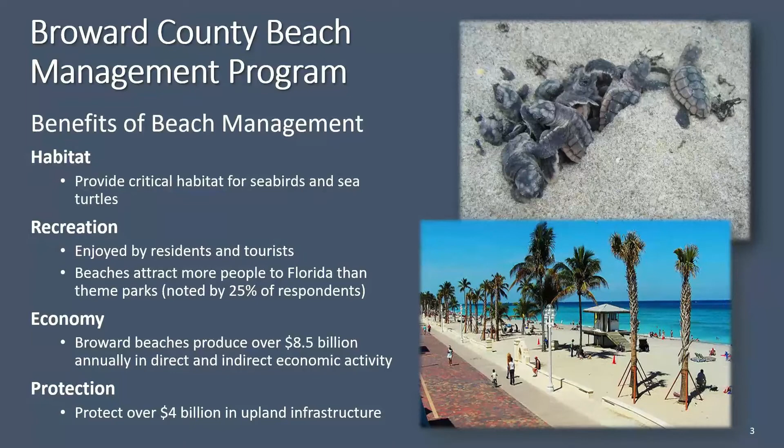So what got us here? Well, many of the beach management issues began with the deepening of local inlets. One of these issues affecting the whole of Southeast Florida to some extent is that offshore Atlantic waves tend to wrap around the Bahama Banks and approach our shores from the north, which means that littoral sand transport within the nearshore zone tends to lean in a southerly direction about 80% of the time. With dredging and deepening of the inlets, the net southerly movement of sand was typically blocked to some extent.

This disturbed downdrift sediment budgets. Over the years, many ad hoc efforts were made to stop the resultant beach retreat, with groins and hard armoring most prevalent. For the most part, they weren't effective. While they may have stabilized a small part of the beach, due to the limited amount of sediment within the coastal system, they typically only aided in accelerating erosion rates.

At one point, it's estimated that there were over 230 groins distributed along the county's coast. Because of the need for expensive repair and rehabilitation, a majority of these structures eventually ended up neglected, defunct, and simply hazardous. By the 1960s, the beaches were in such a state that, recognizing the need for a coordinated effort to combat the erosion, the Broward County Shore Protection Project, also known as the federal project, was authorized under the Rivers and Harbors Act of 1965. This act created a framework that allowed the federal government to enter into agreement for cost sharing and reimbursement of planning, design, and construction costs, among other things, for the beach renourishment projects in the county.

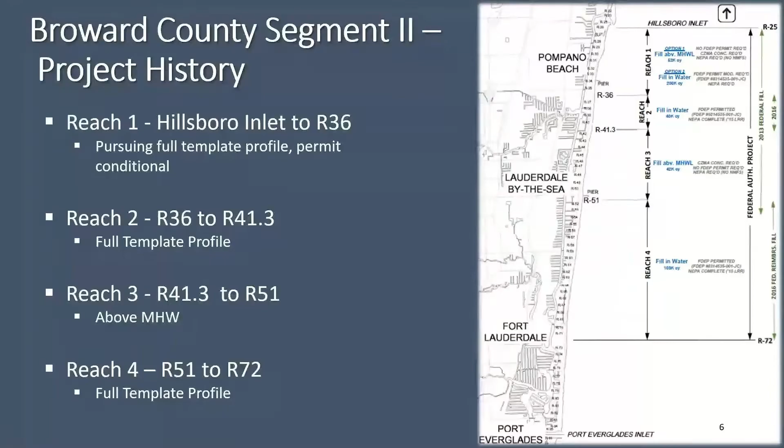With that, I'm going to hand it back to Sam Danchuk to give you an update on what to expect with the upcoming beach project. Thank you, Greg.

As Greg described, this project is being constructed by the U.S. Army Corps of Engineers instead of a contractor hired by the county with city participation. The significance there is that this project, because it's a repair project, is actually saving us money — the funds are not coming from the county and the cities. The funding will come 100% from the federal government.

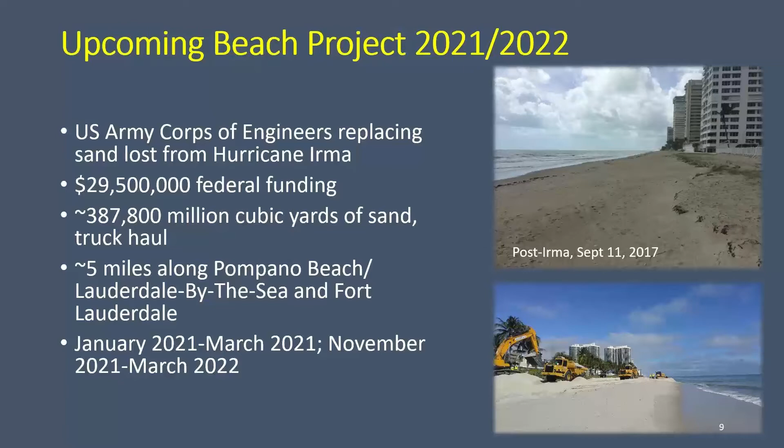The goals of this project are ultimately to replace losses from Hurricane Irma, to limit disruption of beach use and traffic patterns—which is why I imagine many of you joined today's call—and also to avoid environmental impacts and add storm protection to our beaches, to ensure that when we have hurricanes and tropical storms, erosion isn't so severe that it causes damage to property.

It's really, really important to maintain our beaches, and our goal is to maintain beaches as wide as 75 feet in width, although that varies.

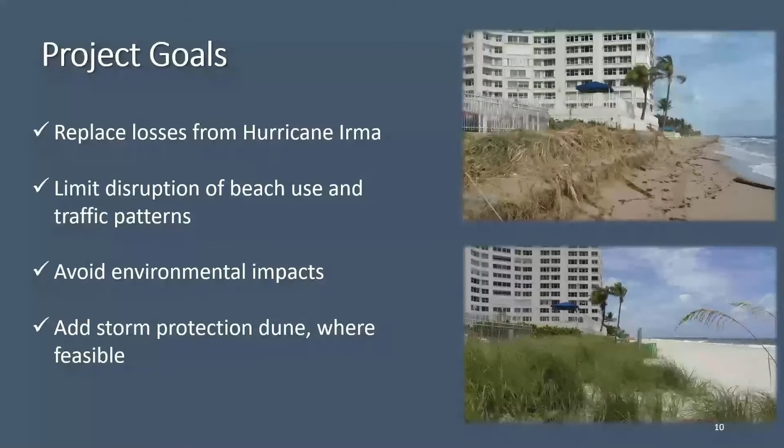The sand itself is coming from sand mines in the center of the state of Florida, and these mines have been pre-approved by the state Florida Department of Environmental Protection. The contractor will have the option of selecting which sand mine to use, and there will be a specified route that they're allowed to use to bring in the trucks of sand.

All of the sand must meet very strict requirements related to the sand grain size, the color, how much silt or fine material is in it, how much shell is in it, so that it matches what the sand looks like on the beach today. So it's very important. We don't have this information yet, but we will on our next update in February.

The contractor will provide his plan for controlling the traffic and ensuring that everybody has easy access in and out of their homes, and to minimize disruption as much as possible within the local routes.

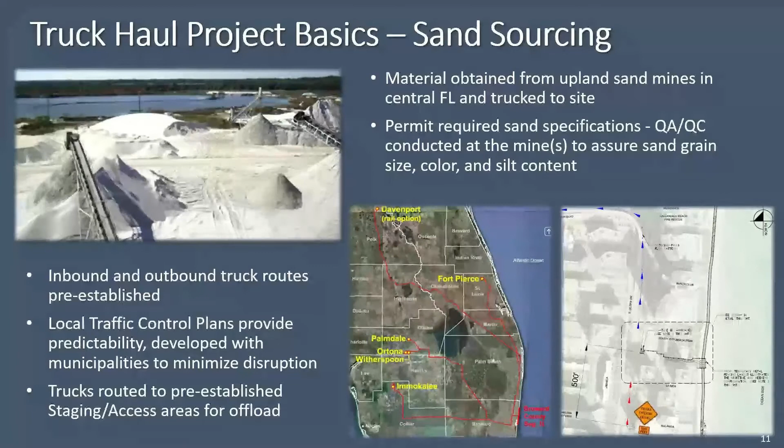Just to confirm, the sand will look like the sand that's on the beach today. Over time, sand does change color slightly. As the sun bakes it, it actually lightens the sand even further. But you can see examples in this photo of sand that has just recently been truck hauled and placed on the beach, and it must match the native sand, which in our case is sand that was previously placed on the beach from previous truck hauls.

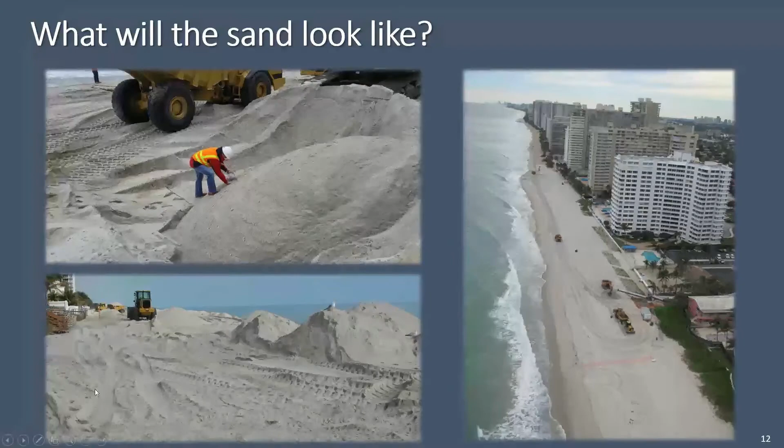To begin our discussion about staging and access, the trucks will be bringing sand to the ends of the streets and essentially getting them prepared to be moved onto the beach. There will be multiple points that are used for sand transport, and then there will be fencing erected to make sure that there's secure areas that are the active work zones.

There will be heavy equipment on the beach in order to move the sand and dress the beach, essentially make it the shape that it needs to be, to create the final shape and slope of the beach. So you may see excavators on the beach, dump trucks full of sand, or other heavy equipment that's needed in order to move the sand around.

In some areas where there may not be space to bring a truck onto the beach, you may actually see a conveyor belt. This was used in one of our last projects, a conveyor belt to move sand from the end of the street onto the beach.

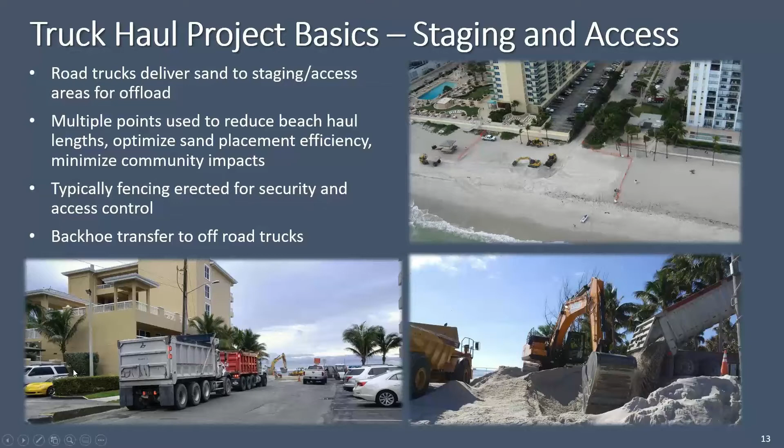To describe how the work zones will look, essentially from the street end, the contractor will need to actively be transporting sand up and down the beach and moving its equipment. So they will be making it very clear where their active work zones are. They will have traffic lanes demarked with signage or even temporary fencing, and they'll have safety vehicles that go up and down the beach with the trucks, so that there's as little risk as possible for anybody coming across that area and walking on the beach.

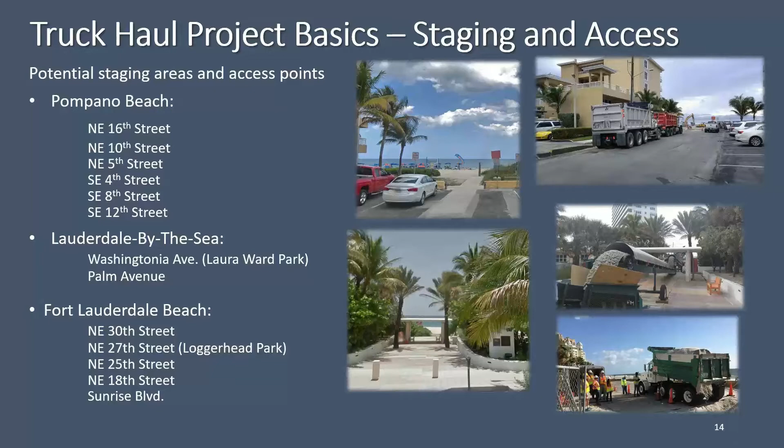The construction zone itself can be as large as 1,000 feet. It's really, really important that the public stay out of this active construction zone. There will be fencing, signs, physical guides, and people standing there trying to advise people to stay out of the area. I can't emphasize this enough.

The trucks are loud. They do have horns that should be on when they're backing up. But it is extremely hard for the truck drivers to see people on the beach when they're driving by. So please do not take any risks and go anywhere past the fencing. We want to make sure that everyone stays safe as part of this project.

And sometimes it's really hard to hear horns and trucks on the beach when the waves are really rough, so I really just want to emphasize that. If you see an active construction zone, please ask if you can go past it, and please read the signs carefully to keep yourself safe.

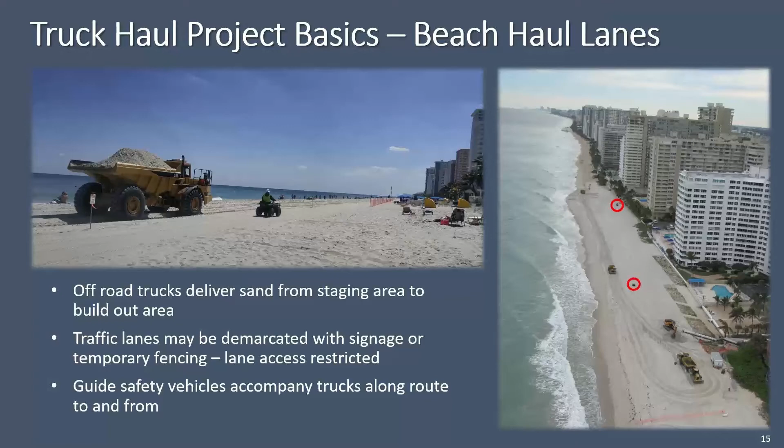I just want to be clear about where sand will be placed.

Greg gave you two examples of how, depending on what the offshore environment looks like, sand may either be piled up in a narrow section, only in the upland above-water portion of the beach, or in some areas the sand will be placed and moved below water to give a full template of the beach. Whatever you've noticed in past projects, the same type of project is going to be built this time around.

Some property owners have provided perpetual storm damage reduction easements, which allows sand to be placed in a small area on their property to maintain a continuous design line of sand. We recently went through another round of trying to get all these easements in place. If a property owner did not provide that easement, sand will either not be placed in front of their property, or it will be placed seaward of the erosion control line, which is a line already adopted by the state that allows sand placement anytime. We'll be very careful not to place sand where anyone hasn't allowed us to, but where permission has been provided, there will be sand so there's continuity in the beach.

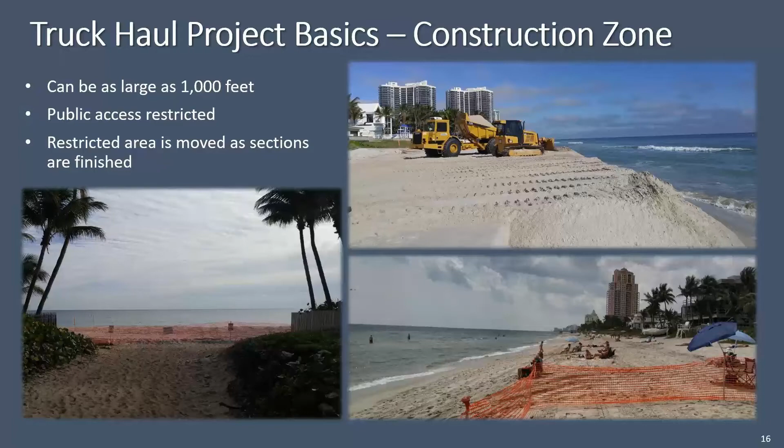Throughout the project, several items will be monitored. Vibration monitors will be placed near the buildings, adjacent to street ends and access areas, so vibration can be tracked to ensure there's no structural damage from trucks driving past. Also, as sand is pushed into the water, there will be turbidity monitoring to make sure no plume of fine material is released, since we wouldn't want any damage to the reefs. Water samples are taken throughout the project to make sure turbidity never gets high enough to risk the reef.

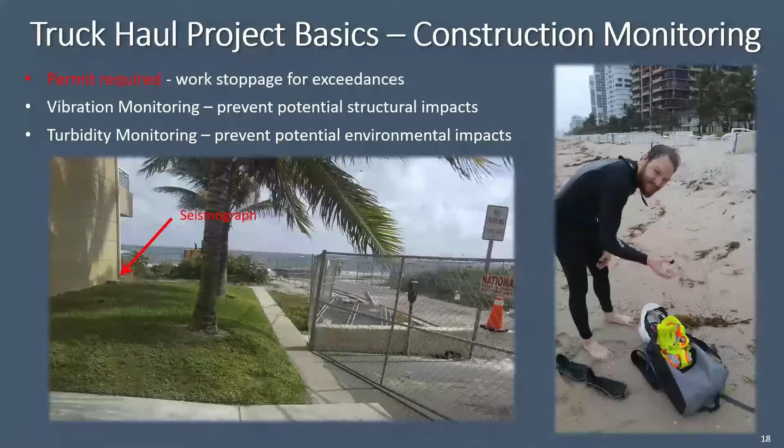Additionally, environmental monitoring will happen during and after the project to make sure none of the near-shore hard bottom, coral, or other reef resources are impacted. Specific species are monitored related to coral, as well as sea turtle monitoring that happens throughout the year to ensure no harm is done to turtles, as well as to seabirds, which nest in February and March, making sure there's no risk to any other marine animals or resources.

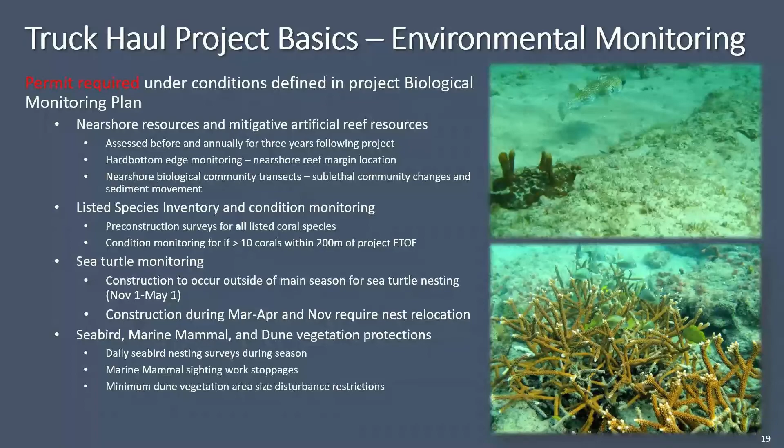Next slide, please. Since it's a great opportunity to speak directly to beach stakeholders, we wanted to raise that we do have sea turtle lighting ordinances in effect throughout the county.

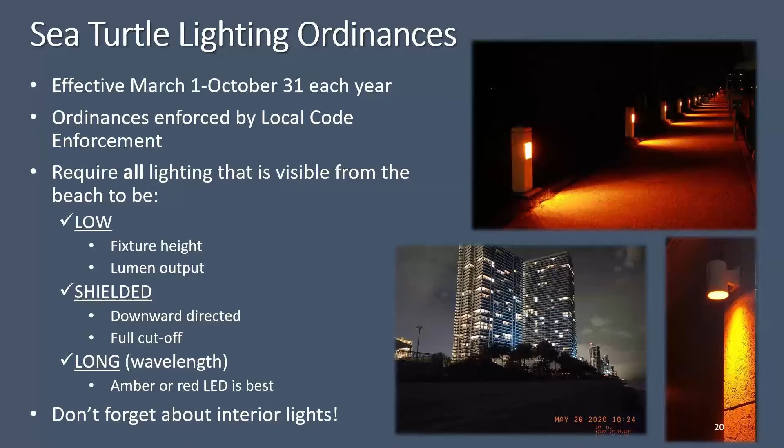From March to October 31st is sea turtle nesting season, and it's required that all lighting visible from the beach have an appropriate fixture height and warmth or lumen output, be shielded so there's no direct light to the beach, or even have a full cutoff so light is focused straight downward where needed for safety, not allowed to escape to the beach. It's really important to remember interior lights too. The examples on the right show that if you have all the lights on in your kitchen, that can be seen from the beach and is very disorienting for the turtles. We'd really appreciate it if you draw the shades and comply with the ordinances in effect.

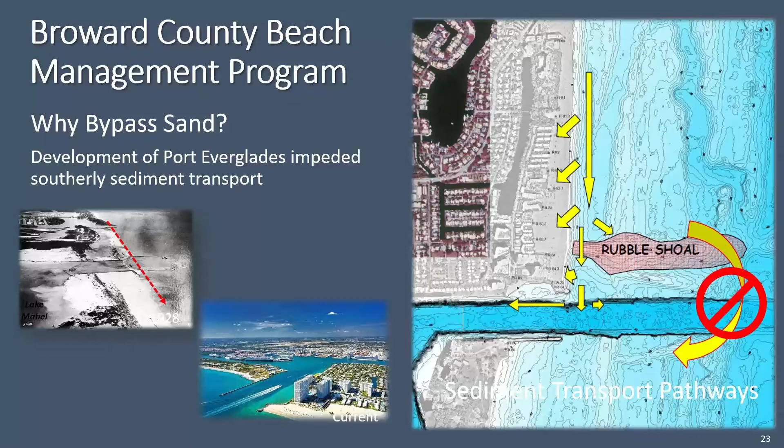In order to build this mechanical sand transport setup, we need to build a giant hole at the north side of the jetty: an 11-acre sand trap dredged to a depth of 29 to 50 feet, removing about 365,000 cubic yards of material.

The jetty on the north end will be rehabilitated so it doesn't allow sand to pass through into the center of the inlet. Then there will be a mechanism so sand can be dredged from that sand trap and moved to the south every 2 to 4 years as it fills up.

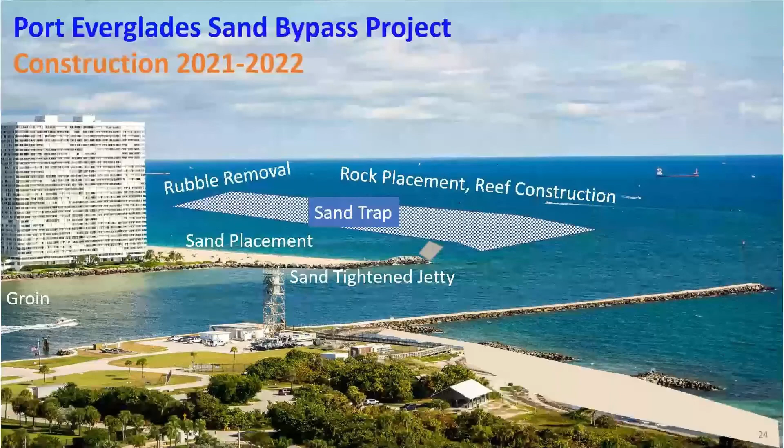This project is in procurement now, and we hope the county will award a contract in April of 2021. Dredging could begin anytime between May and November of 2021, with jetty improvements happening during that time as well.

There are also two mitigation reefs, artificial reefs, that will be built as part of this project.

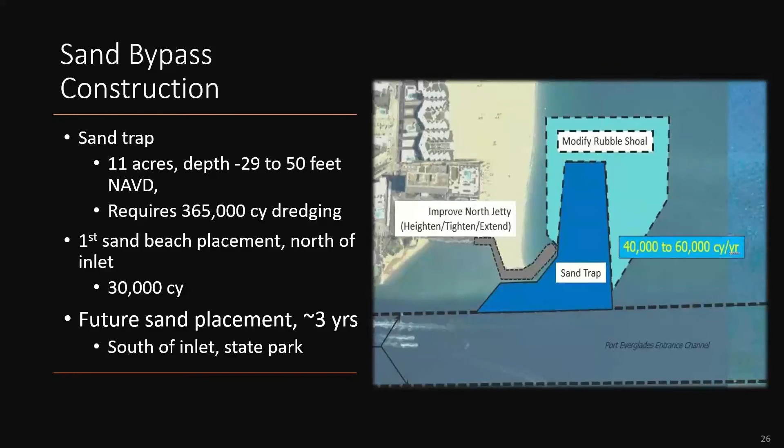This shows the sand trap visually, where it is offshore—actually in front of the Point of Americas buildings, just north of the North Jetty of Port Everglades.

There is jetty repair work that will be done. Rubble left offshore from when the inlet was first dredged and the jetty first built will be removed, allowing over 7 acres of hard bottom to be re-exposed, giving coral an opportunity to naturally recruit there and become a healthy ecosystem again, along with the reefs I mentioned.

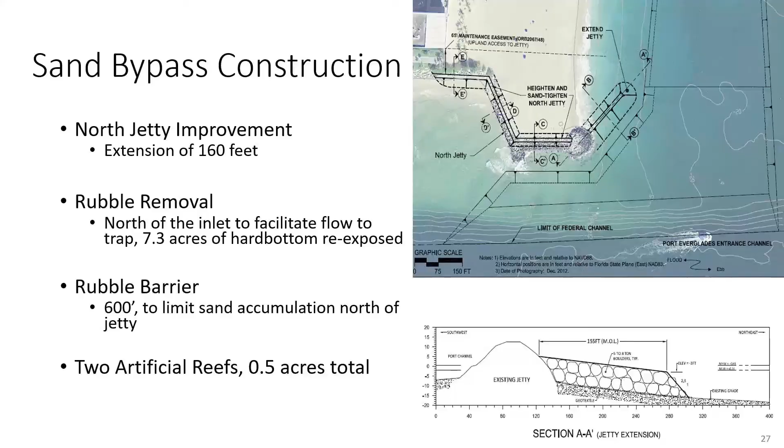If you are in the area of Port Everglades, you may see this type of equipment actively being used—dredging offshore, rock work by excavators and cranes on barges along the jetty, and sand being placed either on the north end in front of Point of Americas or moved south to the state park. Going forward, every time the sand trap is dredged, that sand will be moved south and placed in the state park.

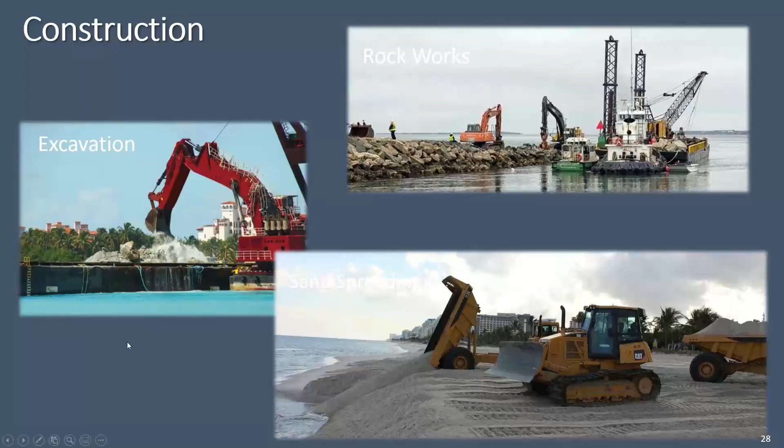The two projects I described today, the Segment 2 beach repair project and the sand bypass project, do overlap somewhat. Segment 2 could begin as early as February, and the sand bypass project could happen from April to November, so you'll see quite a bit of work happening next year in 2021, with these two projects overlapping.

We wanted to let you ask questions today on both the Segment 2 project and the sand bypass project, since they're both relevant to your area.